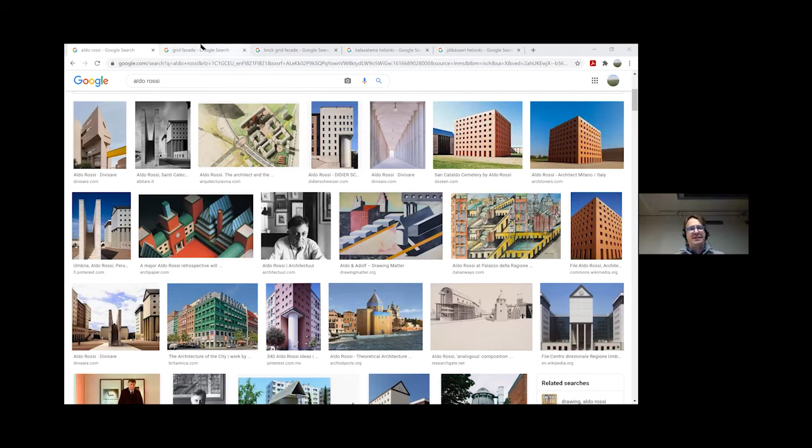That took me a long time to actually start to appreciate and understand him. Yeah, 20 years or so. And just when I felt that I started to understand him, this kind of mythical figure from the past,

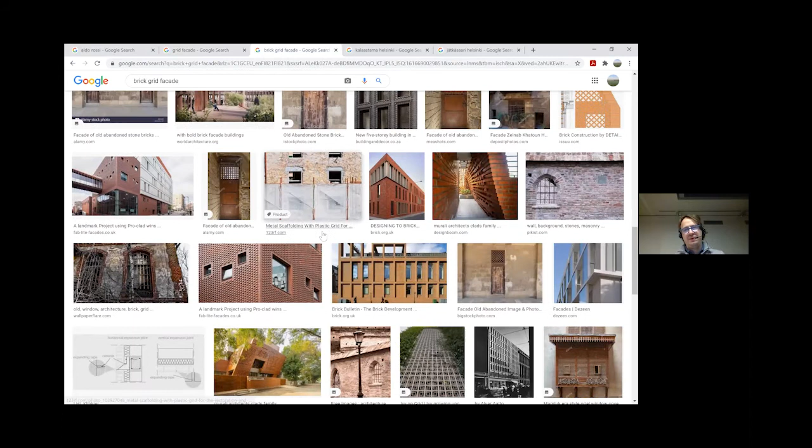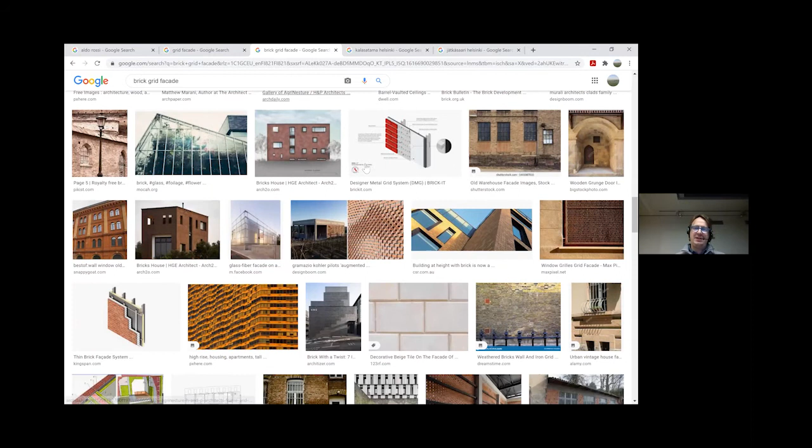I'm starting to also now understand that what a lot of construction industry is doing is getting closer and closer to Mr. Rossi's work. So if we just Google brick facade, and even better if we Google like a grid brick facade, we can see that more and more in the last maybe 10, and last 5 years, architecture has been coming back to this heavy symmetrical, almost mausoleum-like, or

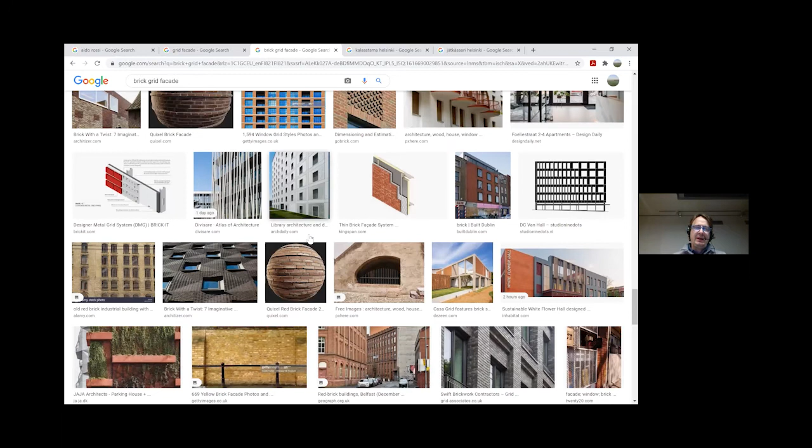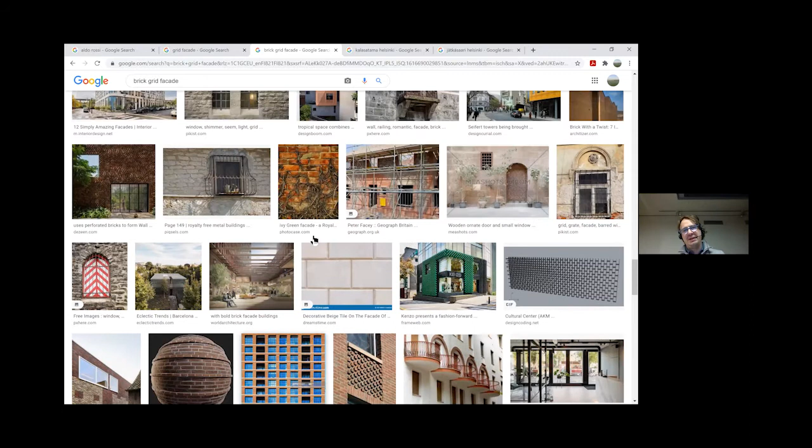cemetery-like qualities that we are, as a profession, in a way escaping the willingness to push forward and push for new technologies and be experimental and outrageous - understandably in a way because of the climate crisis and several challenges that our societies are facing, and the crisis that the planet is facing.

I feel that architecture is kind of retreating, trying to become almost automated in a way. I see that a lot of younger colleagues are unwilling to make what they feel are too grand design statements, and they feel that work from offices like us is this kind of identity architecture, this 'wow architecture' - one of these negative terms that's sometimes associated with it - and that

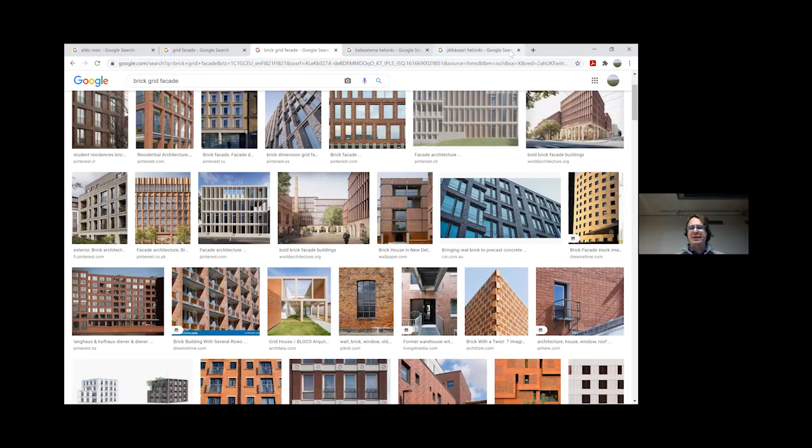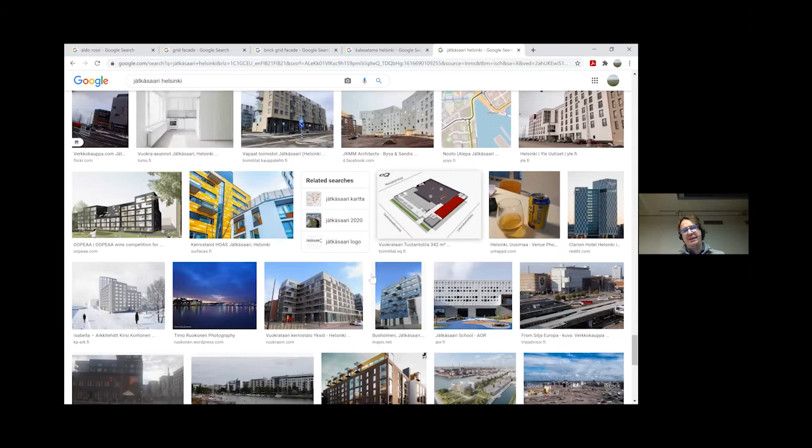there's more socially and ecologically responsible architecture by rejecting architecture and going into this almost auto-generated, very often, at least in Finland now, brick facade grid patterns, behind which any function can happen. This is now a Google search for one of the big new residential area developments in West Harbor, close to downtown Helsinki.

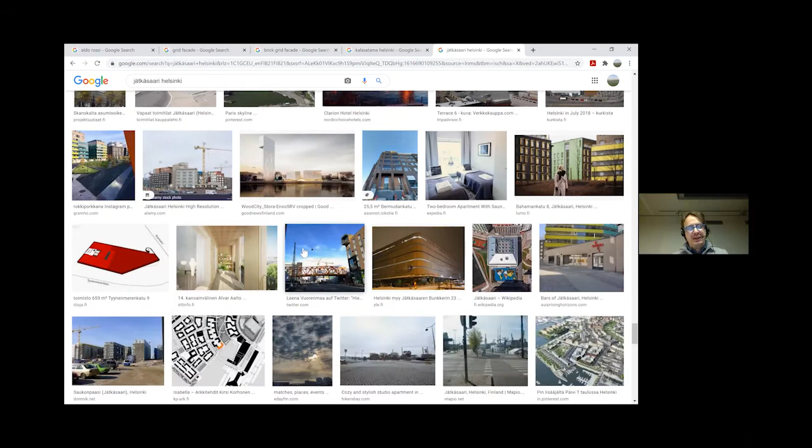And Aldo Rossi and the rejection of, in a way, strong futuristic architecture and this kind of slightly moralistic false modesty is resulting in this very heavy and repetitive brick city of brick, where these buildings are not handcrafted by bricklayers like they used to be. It's a huge scale of industrial production that we're talking about here.

Even in the small city of Helsinki, this one extension of Helsinki is in total 1 million square meters of new construction, and this is just a tiny bit of what's happening in Europe overall, let alone the entire globe. So it's of course true that it's stupid to pretend this.

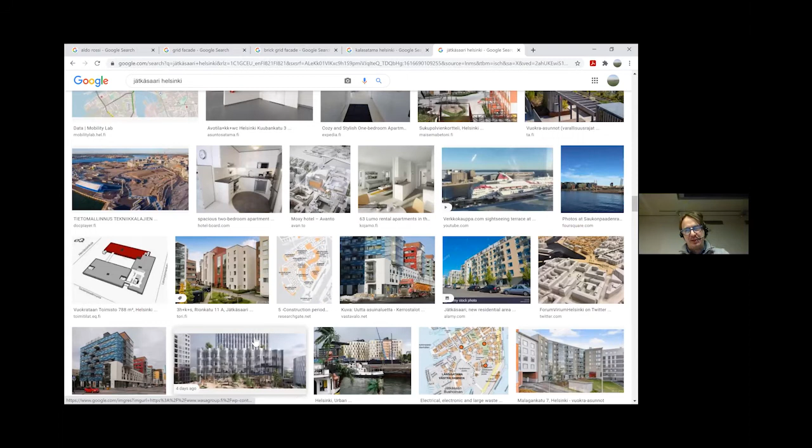By the way, this is our project - I didn't know that it's here. That's not brick, as you can see. Obviously the interesting project in this Google search.

What I'm saying is that it's stupid as an architect to pretend that every project is like an individual that can start from zero and go anywhere. If you look at the whole building industry and realize that every architecture office, the good ones and the bad ones, big ones and small ones, inspired and not so inspired ones, we're all part of the global construction industry, and what we are doing is being part of a machinery that works on a gigantic scale, and is such a big part of human activity on this planet that we absolutely have to take full responsibility with what we do.

But I think it's a quite common fault with young architects and students.

That's why I wanted to start with this, to think that a normal simple project is somehow separated from the rest of the context. It's not separated. Just by looking at these global trends and thinking about Aldo Rossi's work, and what everybody's designing here, what are the ways to win competitions—we are now working globally on one playing field.

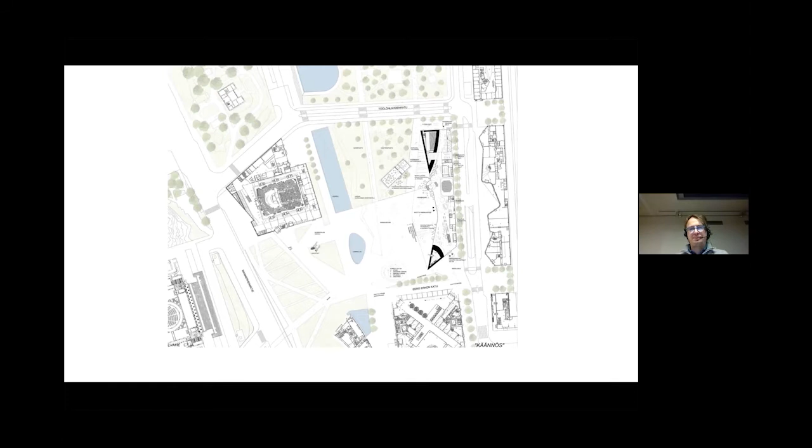So you can see how the 3 levels communicate with the buildings around. One important building the library forms a relationship with is the Finnish Parliament—this quite serious building facing the library over a series of public spaces, with a big plaza in front where demonstrations, political events, celebrations, and festivals all happen. So there's a nice dialogue between the very contemporary library and the old-fashioned parliamentary building: here we have 200 representatives voted by the people, and here we have all the people, thinking about who to vote for next and debating it—really that kind of democracy.

The kind of enlightened, serious citizens using their tool to be even more critical and demanding of their elected representatives. That's one of the things this building is, but it's many other things.

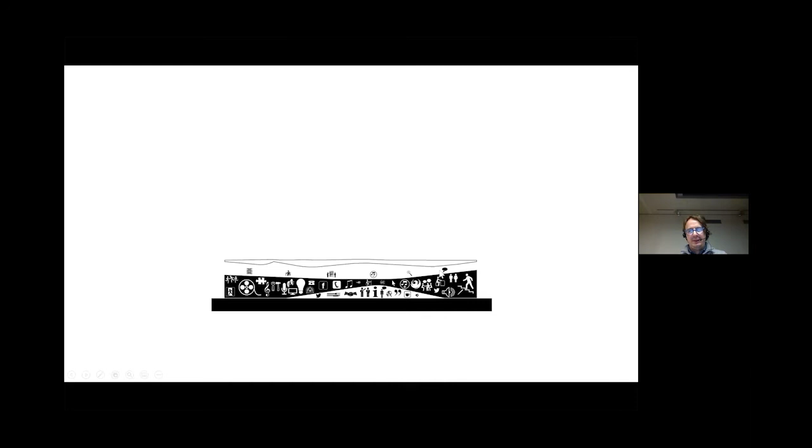In diagrammatic form there are three levels. The middle one is solid, and we manipulated the form of the solid to make it touch the ground at the ends, lifting it up slightly at the ends to hide staircases and toilets, keeping the top level really open as an open landscape.

Besides cladding the middle part with timber, we also made it the technical and structural core of the building. We built it as a bridge spanning over the ground floor, permanently casting this diagram in steel, concrete and timber structures so that you cannot add columns or separations in the ground floor, and cannot remove the columns and separations in the middle floor. The top level has to be light because it's sitting on this 100-meter span bridge.

So the three different levels and conditions relate not only to the ground plane but also to their physical relationship with the building frame—the bones of what the building physically is. The frame is what defines these three levels as distinctive and permanently different.

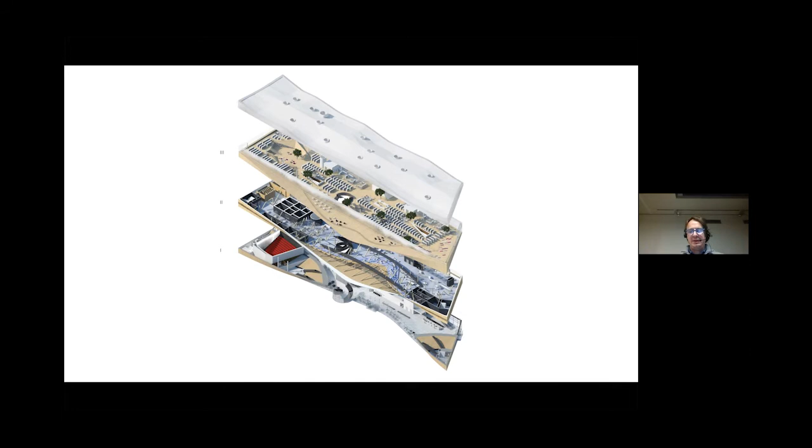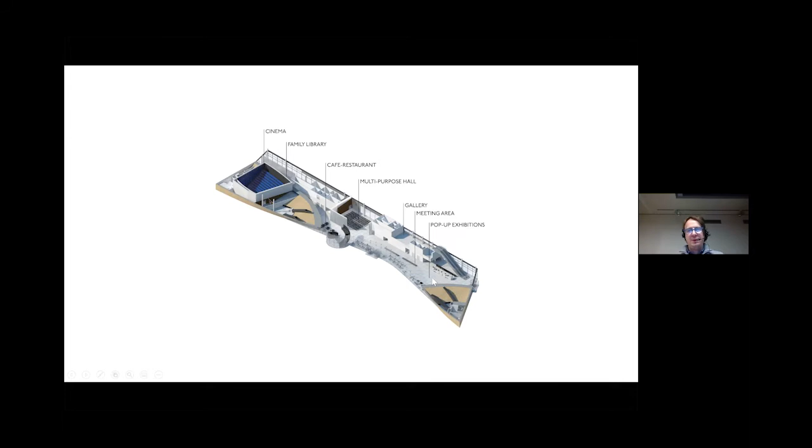There's an interesting public toilet in the basement, but all the other public facilities start from the ground floor, which the steel bridge spans over. It's a space where you can just pop in and out, hold large meetings or events in a cinema or multi-purpose hall. There's a restaurant, an info desk, a lot of pop-up exhibitions, and open public space.

You can see the timber-clad second floor spanning over the open space below, with no columns or structures limiting what can happen here. Sometimes it's empty, sometimes it's the indoor part of a festival happening in the plaza outside.

The idea is that it's every day a little bit different. You can walk through it on your daily commute and learn something new about what's happening in the city, what the library is doing, what books are out, or just maybe have a chat with the librarian, ask them something, or check out a book, whatever you want to do.

It's kind of you're almost not even in the building when it's so easy to get in and out of this. And it's also very inviting in terms of security and control. There are no metal detectors, there are no visible security guards, you don't need to have a library card or any identification to get in, and you're not being treated as a potential nuisance, but everybody really is welcome to use the building the way they want to use it.

So there's a lot of people working from this building, organizing business meetings and all kinds of events. So it's really like a community center, but right in the heart of the city.

This is the multi-purpose hall, this time used for a senior citizens event. And this is the restaurant, which is in the northern end of the ground floor under the timber shape. And then there's a cinema showing the National Film Archive series, a lot of great Finnish films, of course, there. So this non-commercial art house cinema run by the Finnish government also decided to relocate into this building. It really complements the rest of the functionality nicely.

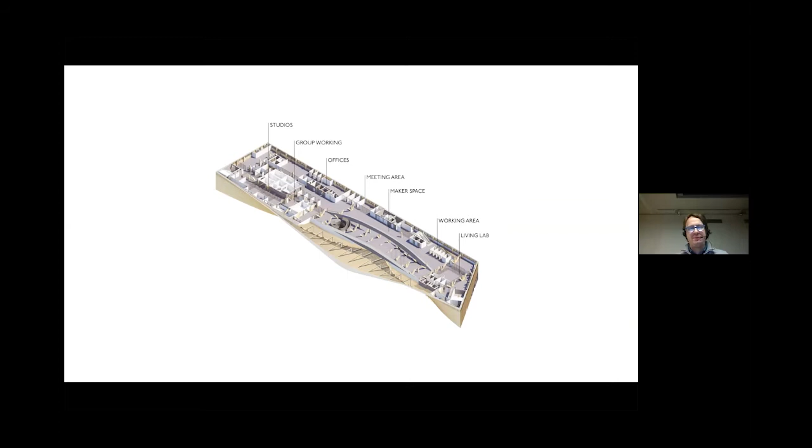Then going to the middle floor, like I said, we needed one level of rooms, a sequence of spaces for individual functions and events where people can do things that would otherwise disturb other people. Then they can get a room on the middle floor.

So there's an area called the Urban Workshop, which provides citizens with all kinds of simple tools, from 3D printers to sewing machines to large-scale printers, and you can use them for fun or for serious reasons. You can do your homework or just your handcraft assignments here, or just use the free computers and online access.

And you can see from this image that the middle floor is really almost on the other side of the building, in a way, this kind of almost like a technical plant room. So there's the steel bridge structure and then the parallel steel trusses that are clad with Finnish birch to make them more touchable and nice.

And then because of the facade cantilever, it's making this curving, swooping move in the facade of the building underneath the balcony. That reduces part of this floor into these steps, which we then just built following the geometry.

And then it wasn't really in the room program. It's not a kind of very systematic utilitarian architecture where you just list the rooms, give the sizes, and build them as efficiently and cheaply as you can. You never end up with spaces like this. But instead of just walling this space off, we decided to build this series of platforms or big steps there, and there's always people sitting there and using that space in various ways.

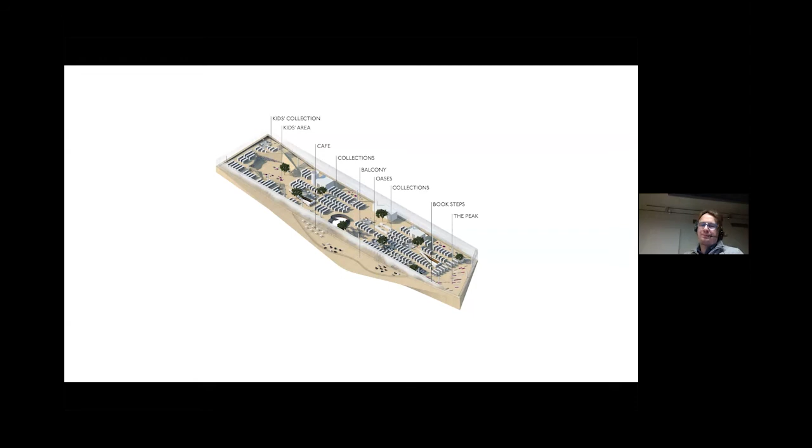On top of the wooden volume, we have a kind of quiet traditional library landscape—books, light, longer views to the city—a place for not so much social interaction or playing with new devices, but for reading, thinking, contemplation, maybe writing, coming up with new things, looking at old and new books or comics or board games.

You don't have to be completely silent—there's a certain background hum of 500 people being in one large space, but the ceiling is completely sound absorbing, with no reflection of sound, so the atmosphere is very quiet.

You can look at the parliamentary building from the balcony level—you're on the same level as the members of parliament when they're entering their building. There's a balcony which is closed during winter but opens in summer: a continuous timber deck with a nice bookshelf system, all kinds of seating, and a continuous glass wall.

360 degrees—all the facades are made of glass with a white dot print, a changing cloud-like pattern that makes the facade white from the outside, cuts unnecessary daylight, and creates a certain internal atmosphere.

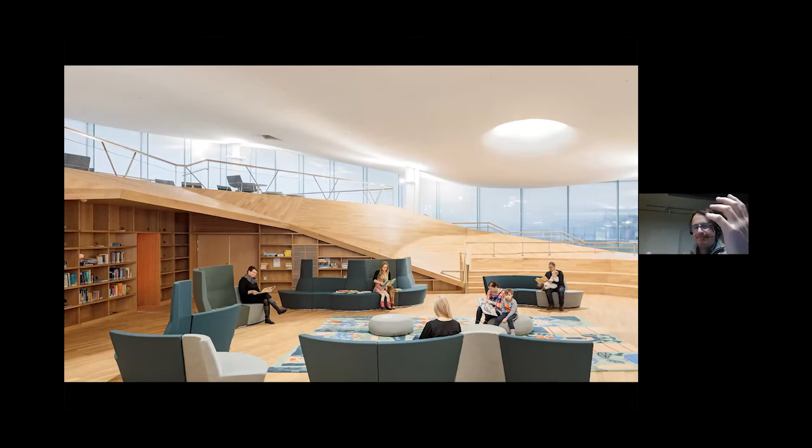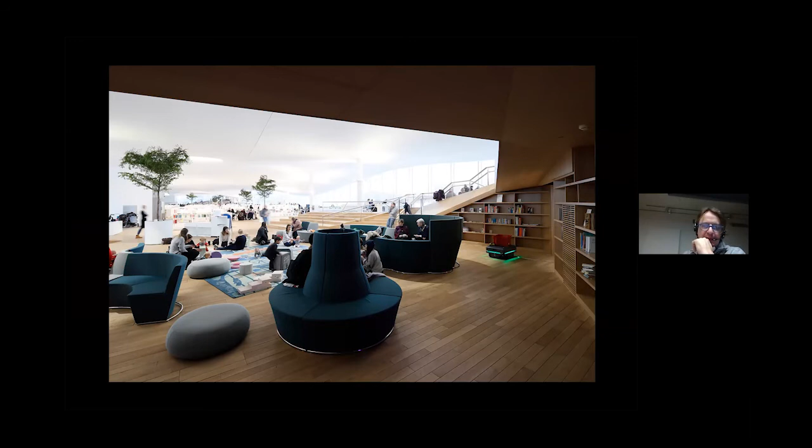There's a lot of views, a lot of daylight, but it's also an internal landscape—the most interesting view is within the space itself. The ceiling is undulating to create a landscape of always slightly different conditions, so there's no repetition, no strict grid, but any small movement within the space changes the conditions slightly.

You move from slightly higher to slightly lower space, and the light changes a little bit; the dot pattern of the facade looks different from a different angle. This is actually an experience we get while in nature—that's why, on a sailing boat or in the forest, the experience of beauty, in my opinion, comes from slightly changing conditions constantly.

On a boat, the sea is always a little bit changing—you're not in a completely static environment. Same as walking slowly in the forest: in a way it's consistent, but there's always a little something. The experience is a little bit adjusted by every small movement.

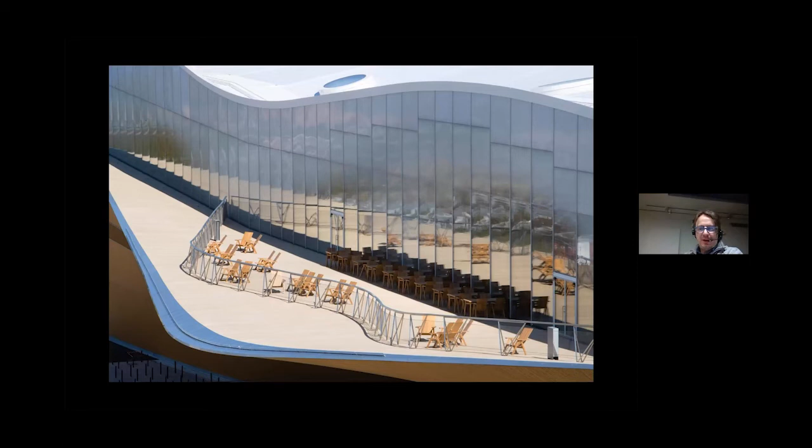So this is what really happens on this top level of the library, and I think that's why Finnish people, I can honestly say, totally love it. This has been a huge success, as you could see from the visitor numbers, and we've gotten some nice prizes.

The detail prize was a fantastic thing to get. It's hard to build such a building so well that even the very critical German architecture press, which focuses on details, really appreciates it. So we are really proud of the high technical quality of this experimental building.

There's a lot of very difficult technical things we had to solve to get this bridge-like building done. But I still think the highest accolade is that normal citizens of Helsinki are really in love with this building. After talking to hundreds of people there, I feel there's a sense of relief that finally in Helsinki, a place of high quality but very conservative buildings, there's something fun and experimental, something they've also seen abroad in places like New York or Warsaw, buildings that create contrasts and surprises and experiences that are not the same as going into your office building or any hotel in the world.

And that was what Helsinki was really missing. So I think, as funny as it sounds, after the pandemic is over, a lot of people come to the library also to be in the space. Besides all the other social and book library functions this building provides, it also provides an architectural experience. You don't have to have any other reason to go there but to be in a slightly different built environment. It's tempting — you go there, maybe find a book or just take a cup of coffee, and it's a great place for people watching, and nobody's questioning your role in hanging out in this building.

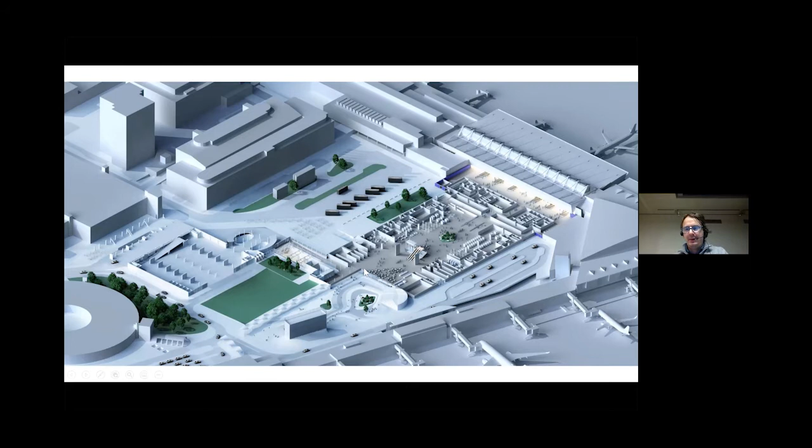I show these more technical renderings as an example of how we typically like to work nowadays - we show clients not only drawings or artistic perspective renderings, but also more technical sequences. So this is where the arriving passengers come in on the lower level, and this is the departing passengers, the car curb, and there's a train station there. And this is how the building looks.

So basically what we're building is what we call the new main building for the airport. All the passengers, starting next Christmas on, if there are already some passengers at that time, will start their journey by coming into this building, and through it, they will go to the different gates and terminals of the airport complex.

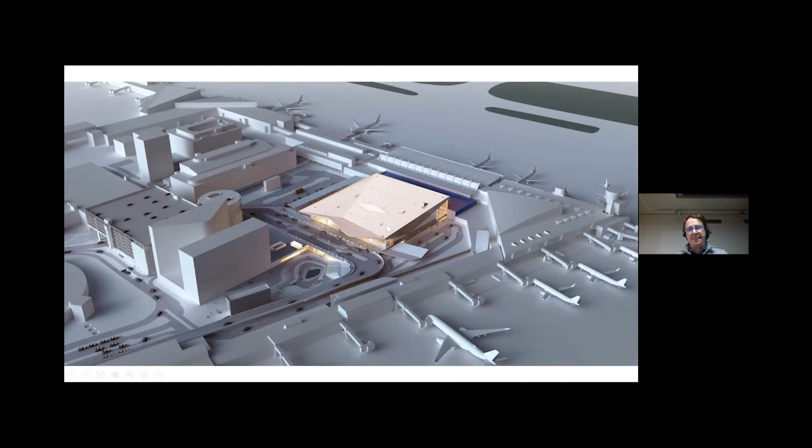So we're building a new building in front of the current airport complex to give it more space, and to give it a distinctive, dramatic, and easily understandable starting point for the journey.

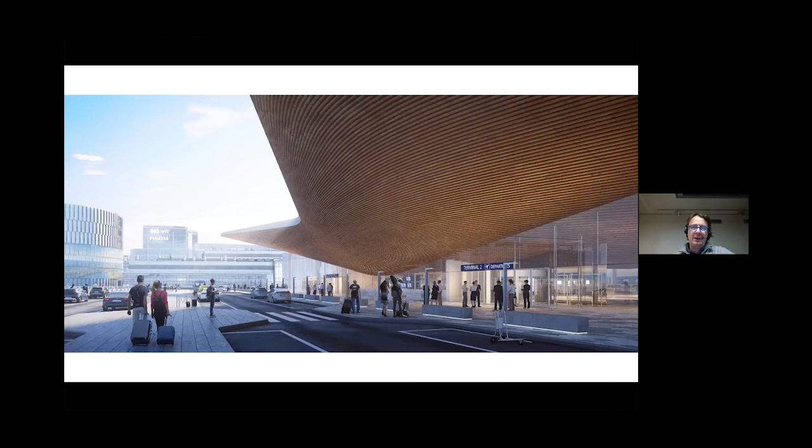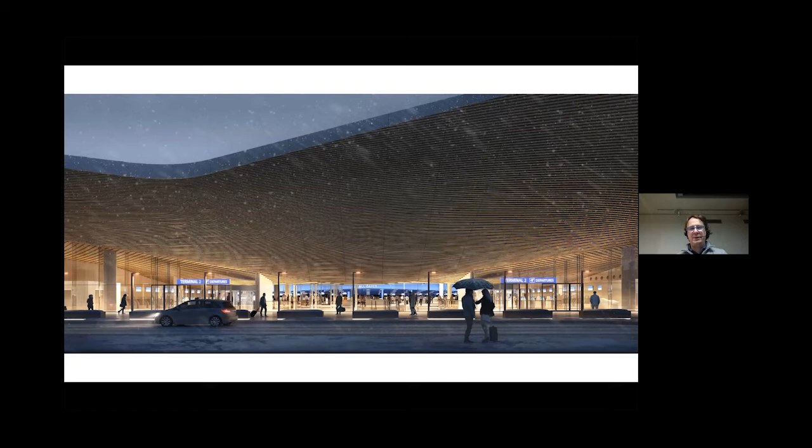In order to do this, we're building this large hall with an undulating timber ceiling, again creating this three-dimensional internal landscape - this time not stacking any other functions over or behind it, but purely creating what feels like a gigantic exterior canopy. Even though getting underneath it and through the glass walls you're obviously in a completely weather-protected space, it's large enough, with natural light and views through this gigantic skylight.

And also the lifted perimeters of the space mean the experience is not of being separated from the outside world like in airports where you don't know if it's day or night. But in here, you're still very much in Finland, very much in Helsinki, and very much part of the day and season you are in.

And you meet your friends here, you do your final preparations before becoming a passenger. And then once you're ready, and it's the right time, you go through this blue wall, through the security checks, and then you take on the role of the passenger.

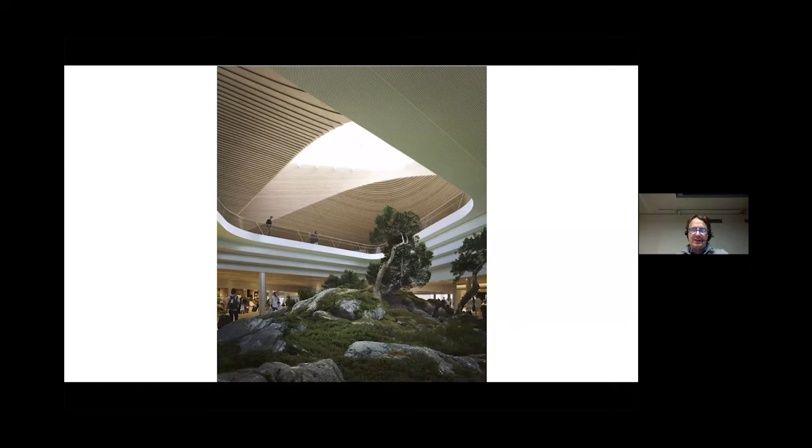Then you're in the generic global world of airports, which all more or less look the same. So there's a big functional and emotional need for this project to look different than the generic airport world that it's a portal to. This is a moment to see some nature, some Finnish timber, some Finnish rocks, and daylight. It's a place to meet even with a huge group, take a deep breath, and then dive into the world of travel.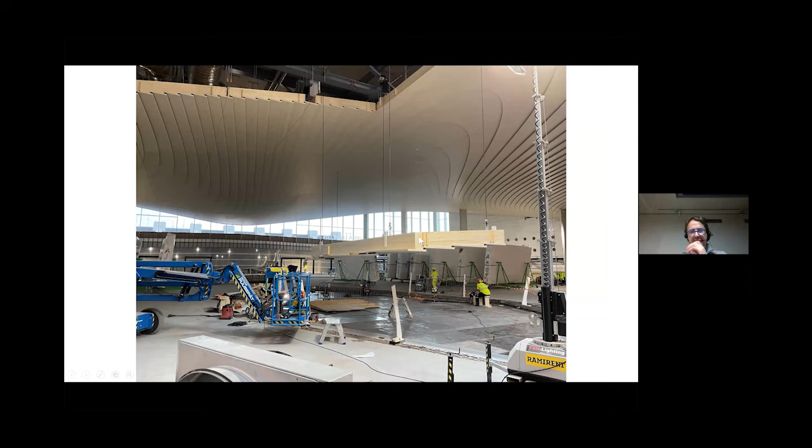As you can see from these site photos, we are already in a pretty advanced stage. The timber used this time is in the form of contours of large CLT-like massive timber plates, fixed into a system of timber-framed elements and then lifted into place with this hoisting system, as it's done here.

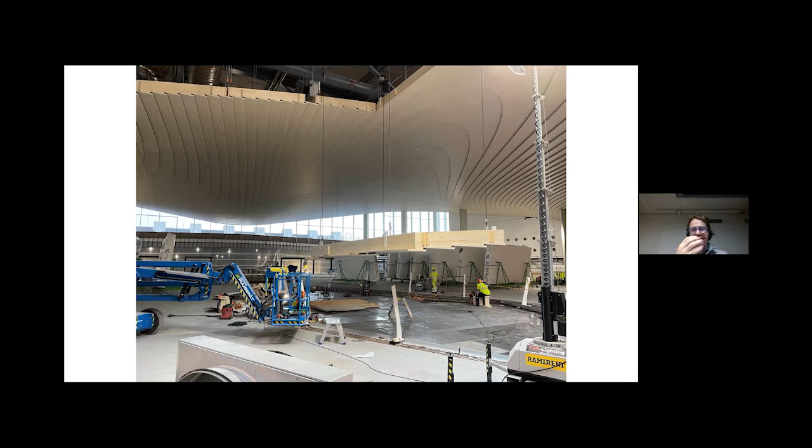You can see it's not handcrafted with small tools, but digitally designed and digitally produced in a large factory as an elaborate kit of parts that are then, with surgical precision and scheduling, assembled on site, while the airport is running all around this building.

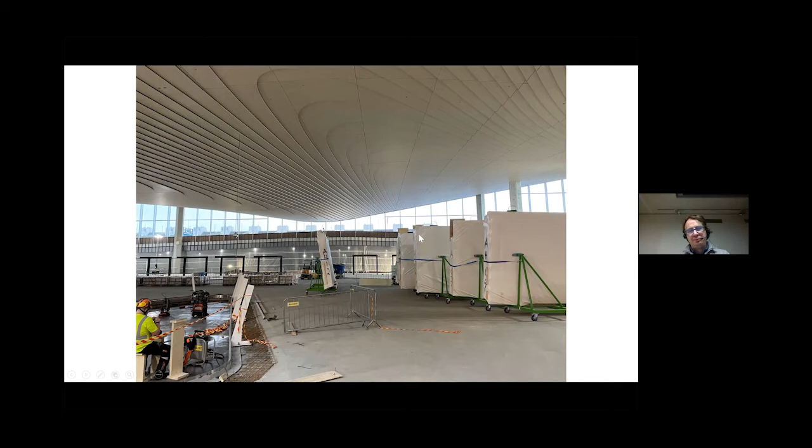So here we can see how the finished ceiling looks, and how the shapes reveal views and glimpses of daylight deep into this meeting hall. It's interesting that when you live in this large space, depending on the direction of light, the timber sometimes almost loses its color and natural texture, like in this image. It looks almost abstract, without material reality.

This is the biggest of the series, and in a way the most simple. It's literally a big roof to meet underneath, to check in your bags and continue the journey. It won't be used for a variety of events like the library — it's not like this friendly downtown place where you can escape your daily life for two hours. It's more part of your journey.

But our aim here is to make such an impressive, delightful, and surprising part of the journey that it actually makes the moment of using this building better, and gives a great impression to people leaving or arriving in Finland and Helsinki.

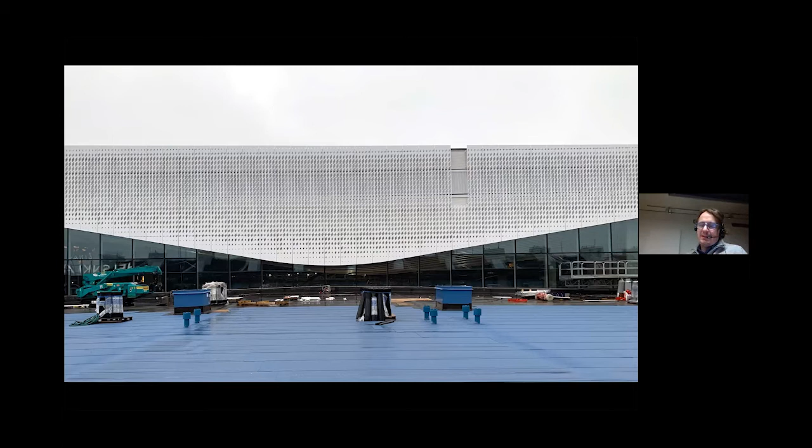Running a studio like ours, this is one of the facades — a big part of what we've come to realize in the first 15 years is that we've done hundreds of sketches and dozens of built projects, and they somehow keep adding up.

So instead of pretending that every project starts from nothing, and that we just magically come up with something unique and significant and better than the brick-grid solution readily available from any other architecture office, we've come to realize that what we can actually provide to clients is...

design work that's not starting from nothing, but is based on what our team has done together before — both the unsuccessful, unbuilt projects, the lost competitions. They all contain design work that's still meaningful. It's in the back of our heads.

We work a lot by sketching and comparing sketches, having conversations and very polite arguments about what's good and what's not. We quite often refer back to what we did five years ago for a small competition in Norway, or the art museum in Poland that had this thing that would have been really nice.

We're not recycling the ideas, but the work of getting those previous projects onto paper and into digital models, in whatever format, keeps them present in our minds. That allows us to generate new things, and maybe better things, because of the experience we've gained through the designs we've done so far.

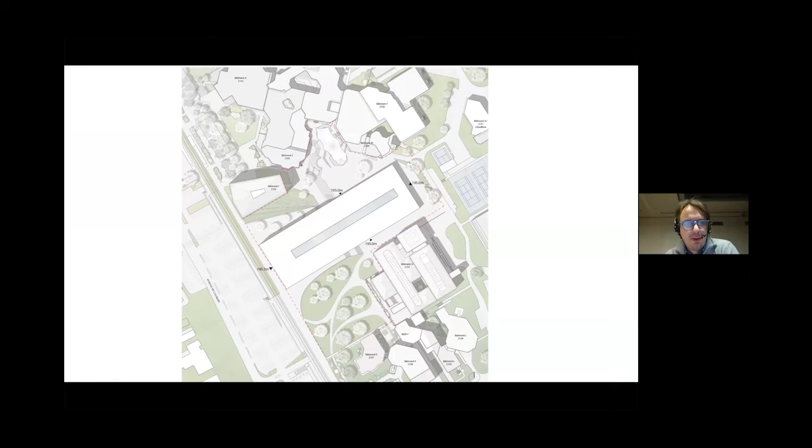Of course, we're inspired by other things too — maybe we try not to be inspired too much by the work of other architects, not even Mr. Aldo Rossi, but rather by arts, sports, politics, people's opinions, nature, history, and sociological things. Of course, the particular context and assignment you're working on is the most important thing in shaping what any project becomes.

What you do is take the assignment and your own response to it. The unique thing our team can bring to an assignment has a lot to do with what we've done before—not only the technical things we know, but more this shared thinking we have through previous projects.

To illustrate that, I'll show some of the current things we're actively working on day-to-day. This is a very simple project in Lyon, France, a little bit outside the city. The site plan shows it too.

We're in a university campus built in the 1960s as a kind of organic building system frame. The idea of the architects at the time was that this campus, built outside the city, liberated from the grids and perimeter blocks of the old-fashioned nostalgic city, would be an entity of its own, infinitely flexible and able to grow literally as technology changes.

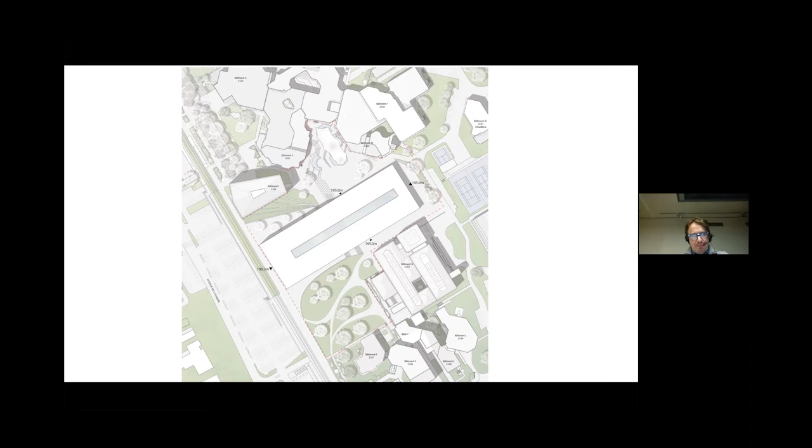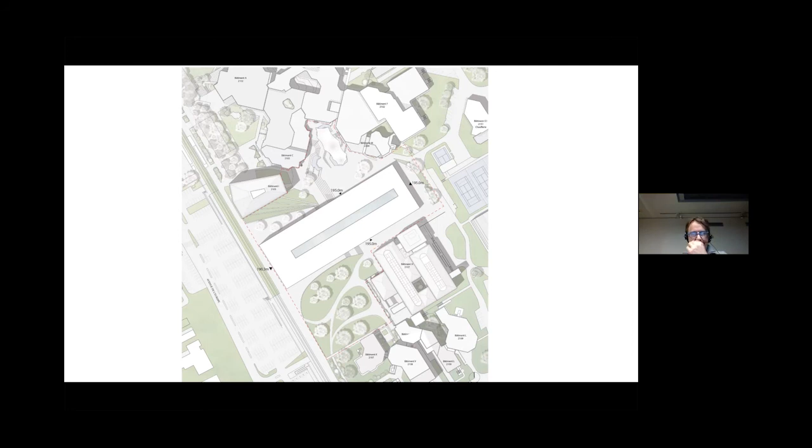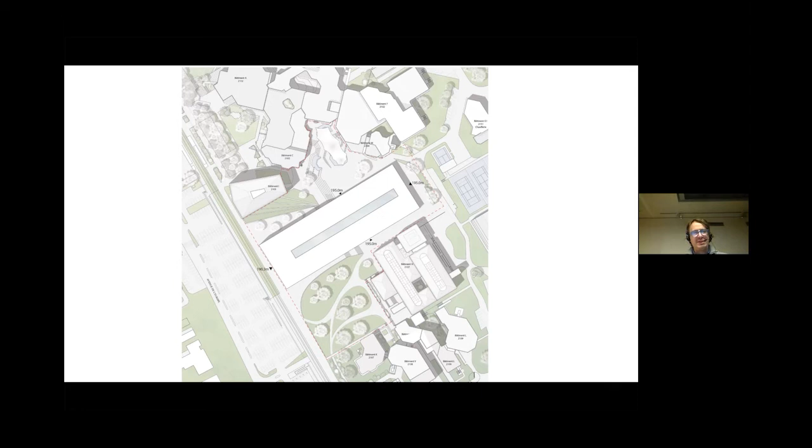It's the campus of the university, and they're happy to use it, but they wanted to build a library and learning center to complement it. Our analysis was that instead of providing something complex as a contrast to rational surroundings, which is often the case, here the context and rest of the campus is already too complex—what it could really benefit from is some simplicity.

So we simply suggested two levels: a solid level, a bit like in Oodi, but this time resting firmly on the ground with a concrete panel facade, with some bigger open panels showing where the doors are, sinking into the ground to match the elevation changes happening everywhere in the campus. Everything is always a couple of steps different from the next, so you can't really move furniture around—it's tough. So this ground pedestal sinks into the topography.

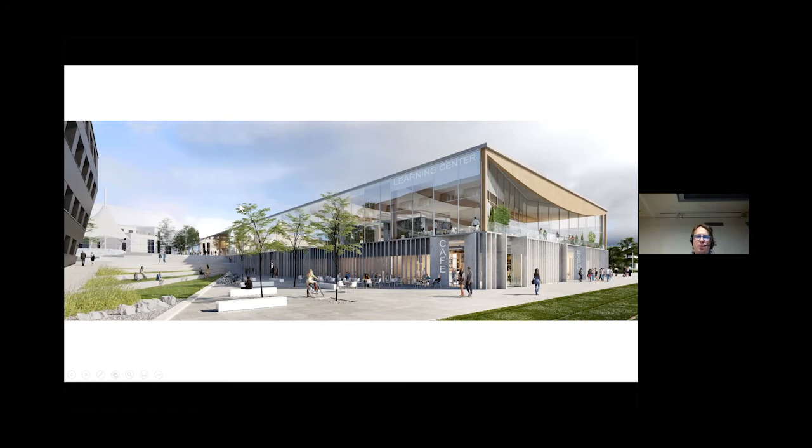On top of it we created a big open flat floor, providing the university with their only place in the campus with a couple thousand square meters of completely continuous horizontal surface, to be used as a library and learning center—a place where students can borrow books, but more importantly study together, do student projects together, and do research together. There'll be a flexible set of furniture easy to move around in this big horizontal, urban-feeling interior space, done with a fairly modest budget using an exposed timber structural system.

There's no cladding—we're showing everything, including the ventilation pipes, and the structural system with slight variation in the spans will create a visually pleasant atmosphere, I hope, along with a grand clear space where you can look into the distance, through the glass wall into the surroundings and the Alps on the horizon.

More importantly, you can look at the internal landscape and feel that there are hundreds of other students—you're not alone in the university, you're part of something bigger, studying together. It also has the potential to meet new friends, team up, and come up with a great student project together, with the books, computers, and furniture to support that quest.

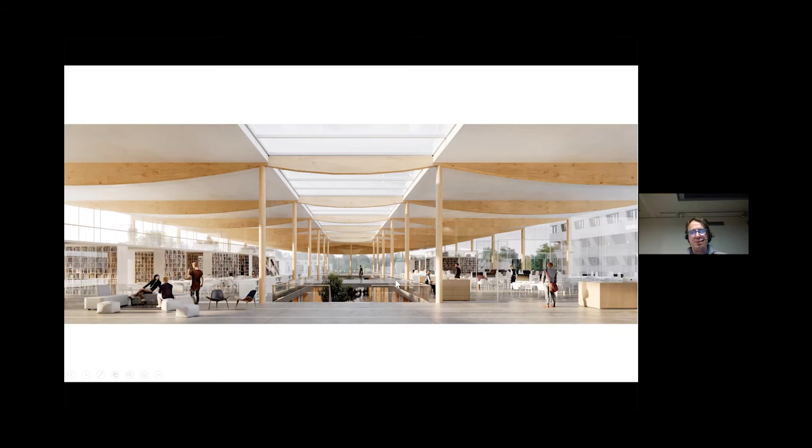Then on the lower level, like in Oodi, there are the individual rooms—teaching spaces, office spaces, and book archives—so that we don't have walls or rooms in the big open space. You can see how the open platform area continues from the existing outdoor spaces of the campus.

Nothing fancy in a way, and a little bit almost like Mies van der Rohe's universal campus buildings in IIT and so on, where there's always a solid pedestal where the rooms are, and then this pavilion on top. But this connects quite interestingly into the organic 60s buildings, and the whole idea is the contrast it creates with the campus around it.

This is starting construction next year. It's been really interesting and partially quite tough, but also an interesting experience working in France, and we're still finalizing the details and working drawings, and should get this built in a couple of years. Definitely I'm very optimistic that this will create a fresh and easy to use landscape for thousands of students at this university.

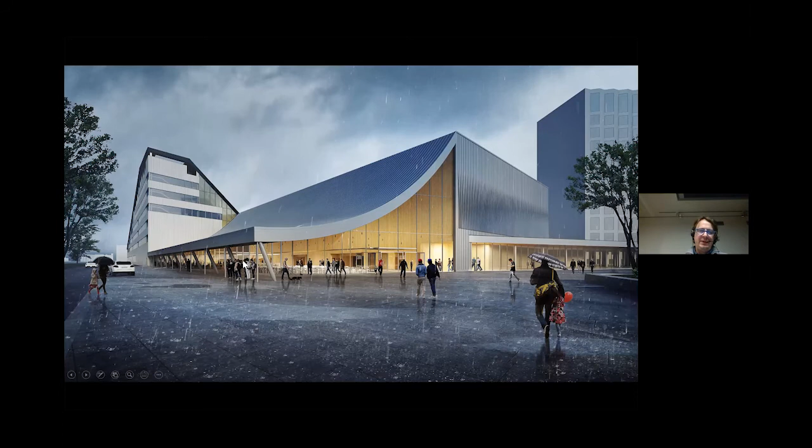Then very quickly, we are doing this event space and hall to harbor in a city in Kotka in eastern Finland. The building on the left is not our design, but our building is a very simple timber box, where one of the facades has been kind of twisted open, and underneath this shape is the lobby. Then it's a multifunctional arena, sometimes used as a sports hall, sometimes as a convention space, sometimes for weddings or product presentations—a real multifunctional hall for a small community.

Again, trying to keep it playful and make it fun without making it ridiculous. I think even though we are big fans of this American landscape and architecture team called Site, which was a big thing in the 70s and 80s, so there's maybe something from that.

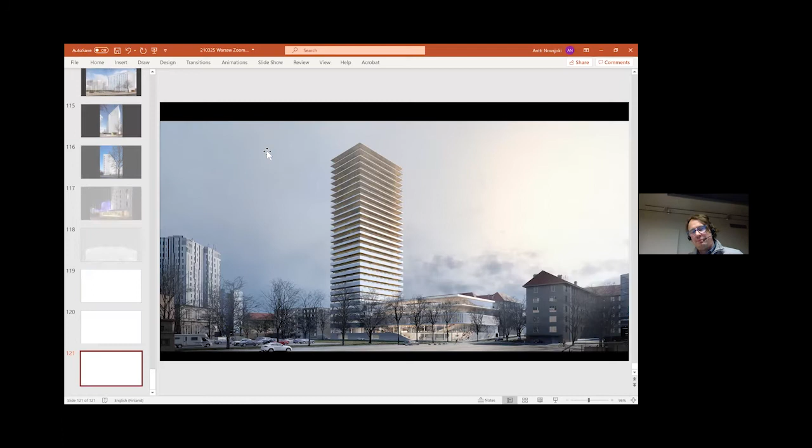So that's a short presentation of what we've done and what we are doing at the moment. Maybe to conclude, just to give you guys an idea what the architecture office of 50 people is doing.

We are now currently sketching competitions or proposals for the following things. We are sketching a concert hall, among 3 teams to do a new concert hall in Finland. That would be fascinating.

Then we are bidding for a factory. We used to joke about that being one of the building types that we haven't really done. But through a slightly surprising turn of events, we are now being considered to be the architect of about a 50,000 square meter factory. I sadly cannot tell you for which company, but it's a small country, you can guess. That would be fascinating to do a factory, of course.

Then maybe even more surprising is that we're also making a proposal to redesign and rebuild one of the local shopping malls. That's something where we'll see if the client is really willing to go with us, but if they are, we are willing to make an effort to find a way forward for what is now a very traditional shopping landscape that's not really doing very well, as you can imagine, in this day and age.

And then also we are competing against some really big global names in Thessaloniki, Greece, for a congress center there, one of the big invited competitions.